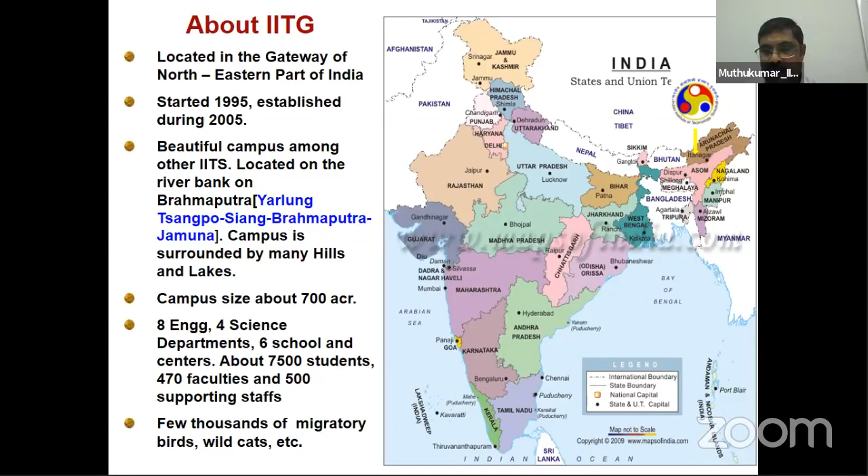So to begin with our talk, I wanted to give some introduction about the importance of energy. I think most of you are aware of the Sustainable Development Goals set by the United Nations, which need to be achieved by 2030. Most of the countries have committed to achieve these goals by 2030. There are 17 sustainable development goals: no poverty, zero hunger, good health, quality education, etc. Among these 17 goals, goal number 7 is energy, providing clean and affordable energy to all mankind.

Basically, sustainable development goal number 7 drives the remaining sustainable development goals. That means only if you achieve goal number 7 can you think about the remaining things. It is the source of the remaining sustainable development goals. Therefore, most of the countries are giving it more importance and taking keen interest in these goals. We are also committed towards this goal.

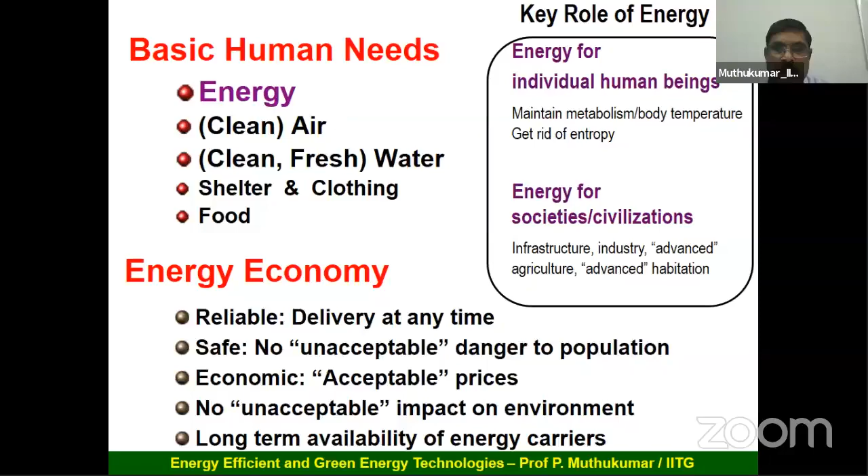So these are the important requirements of the future sustainable energy. If you see the actual fact, nearly about 13% of the world population do not have access to electricity. And another alarming situation is that around 40% of the population do not have access to clean cooking fuel. Even in India, only 46% of the people have access to clean cooking fuel. The remaining, of course, rely on fuels like firewood and even cow dung, etc.,

which is not healthy. And another thing is the global CO2 level is, of course, increasing. If you see the last 4 decades, there is an exponential increase. So considering all these aspects, this is the high time to transform our present hydrocarbon energy economy into an economy where we don't pollute the environment. That is possibly the renewable energy or the hydrogen-based energy economy, which will be explained later.

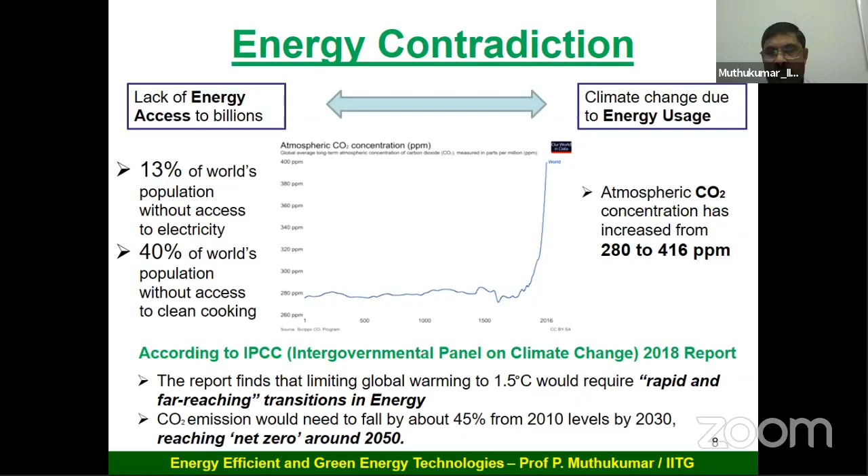And similarly, whatever energy is needed for the building sector as well as the industrial sector should be fulfilled by a source which is less harmful to the environment. So with this small introduction, let us see how our development, our innovation addresses this concern. LPG is the prime fuel in the cooking sector, and it also has a sizable share in industry, like the ceramic industry, the process industry, the pharmaceutical industry, even healthcare industries. Many industries use LPG, even PNG and CNG, as a fuel.

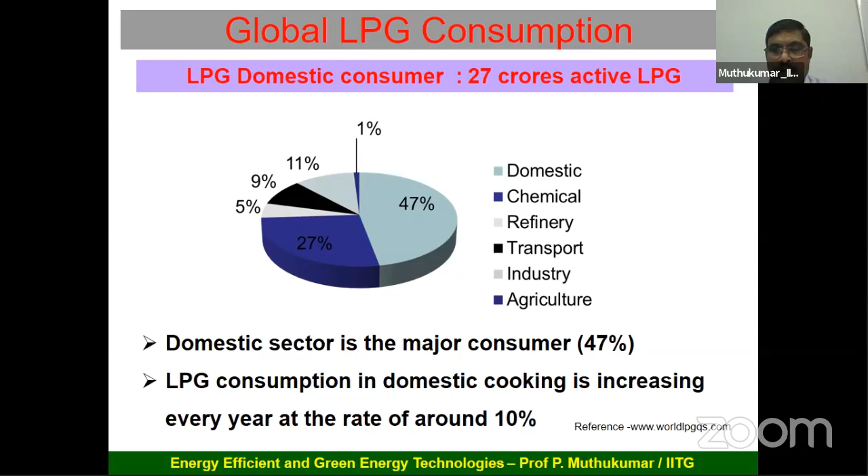We are the second largest consumer of LPG, mainly for cooking application. The demand for LPG is increasing steadily at the rate of about 10%, because our government is committed to provide clean cooking fuel to all in India. As I mentioned earlier, roughly about 50% of the people still do not have access to clean cooking fuel. LPG is a mixture of propane and butane, more or less in equal percentage, but their share may vary from place to place.

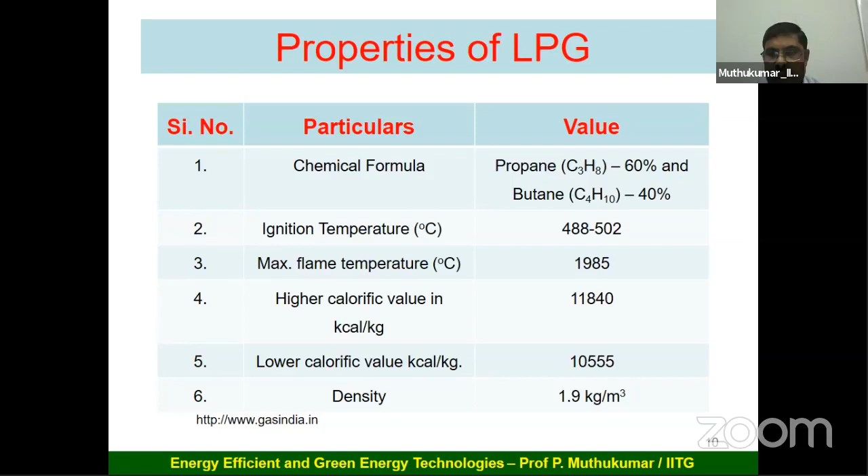The calorific value is roughly about 45,000, and density is near about 1.9 kg per meter cube. At present, we import nearly 50% of our requirement from other countries, and we get only 50% from our own source. This is a huge financial burden for India. By 2030, our government is committed to reduce crude oil import by 10%. This can be done only by exploring our own resources for cooking application, or improving the efficiency of the existing cooking devices.

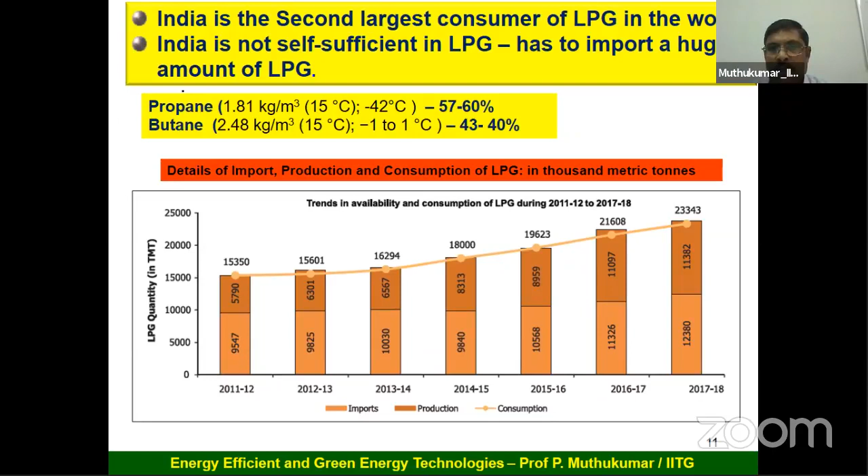And to make the fuel affordable to the common man, the poor communities, our government has been spending a huge amount of money as subsidy. Just to cite a figure, in the last year and even the current year, we are spending approximately 32,000 to 35,000 crore per year subsidizing LPG, from the current rate to a rate affordable by the poor public, and we also have schemes distributing LPG freely to certain classes of people. So our government spends a huge amount every year subsidizing the fuel.

Again, the fuel price is fluctuating; 900 rupees was the rate when I checked 15 days back. At present it may be slightly higher. So the prices are fluctuating to a large extent, mainly because, as I already mentioned, we are importing nearly about 50% of our requirement from other countries.

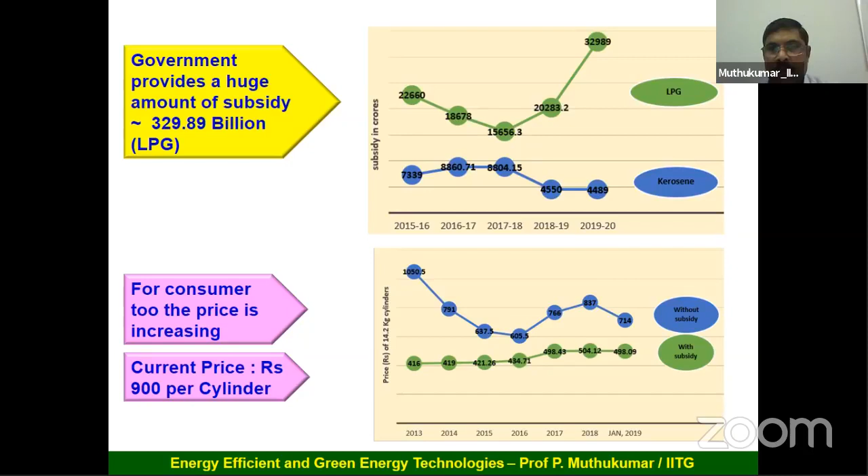Now if you look into the technology we have for cooking application, we have, for example, electric stove, induction stove, then LPG, PNG, and biogas. Each of these fuels has its own merits and demerits. If you see biogas, it is affordable provided you have a gobar gas plant at your own place.

These can be generated free of cost, but you have to take care of the maintenance. The reliability of the technology may not be so efficient, because mainly of the presence of high amount of CO2 in the biogas. Then the LPG stove, everything is fine, but it's very expensive these days and cannot be afforded by the poor class of people. And PNG, again everything is okay, but we don't have the infrastructure for taking this fuel to the rural level.

Coming to the electric stove, in terms of environment I have marked it red. The reason is that as a stove it won't pollute anything, but you have to see where we are getting the electricity. If you generate electricity from a coal-fired thermal power station, for every 1 kilowatt hour of power, the amount of CO2 emitted is roughly about 1 kg. Currently we have about 230,000 megawatts of power generated from the fossil fuel route, meaning every 1 hour we generate about 230,000 tons of CO2 emitted to the environment. That's why, as per environmental impact, all electrical related appliances are rated in red color.

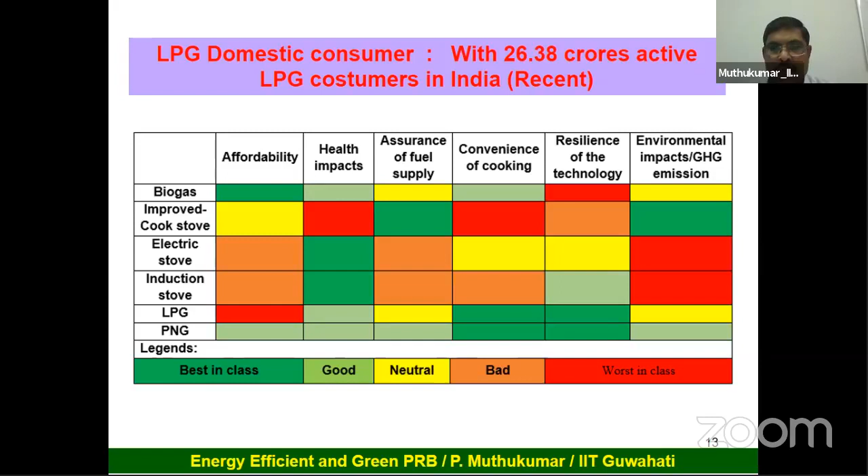These are the devices, the cook stoves available in the market, and most of the cook stove efficiency ranges from 60 to 65%. These numbers are based on laboratory conditions. When you test these stoves in your actual kitchen, the efficiency may be still lower.

Besides having low thermal efficiency, their emissions are very high. For example, CO varies from 400 to even up to about 1000 milligrams per meter cube, and NOx is also very high. These values are much higher than the standard prescribed by the World Health Organization. So we need to carefully think about redesigning the device.

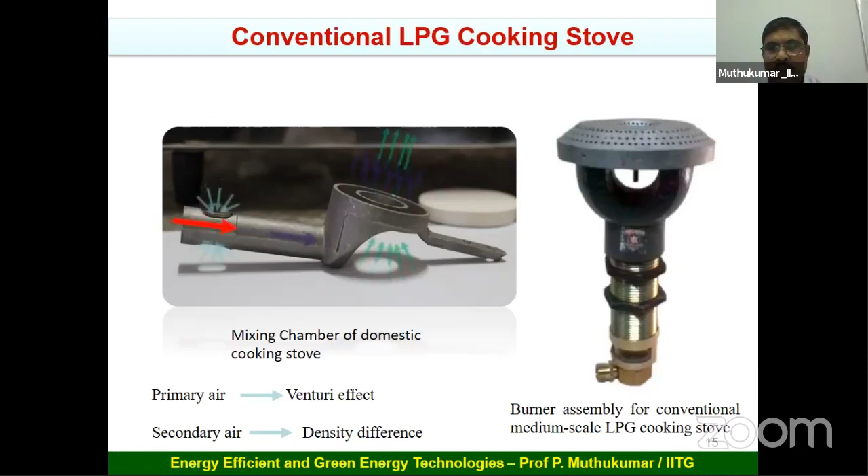Most of the existing cook stoves available in the market work on free flame combustion, where the LPG is injected through the nozzle, and at the exit of the nozzle you experience high velocity, which creates low pressure. Through natural air entrainment, air enters through the mixing chamber and gets mixed there. Then it comes to the top of the burner surface, where the gas mixture gets combusted, and you see the flame. So this is the typical operating stove.

To establish the performance of the commercial cooking stove, we have done the standard water boiling test following the procedure given in BIS 4246, conducting the water boiling test as well as the emission test.

If you look at this figure, the efficiency ranges from say 68%, that is when you operate the burner at low power range, about 1 kilowatt. When you operate at high power rate, maybe about 3 kilowatt, you get roughly about 60%. This is for the domestic stove.

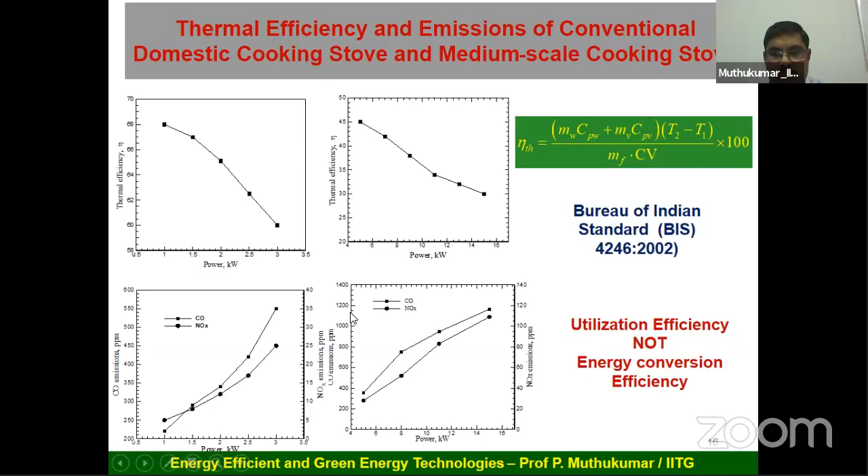Then coming to the commercial stove, which is used in hotels, hostels etc., where the power ranges from 5 to 15 kilowatts, the efficiency is very low, maybe in the order of about 30% when you operate the burner at say about 15 kilowatt. Besides having low thermal efficiency, their emissions are very high, in the range of about 300 to even up to 1,200 ppm, which is much, much higher than the standard prescribed by the World Health Organization.

So this is the background. To reduce the fuel consumption and make the device more efficient, we introduced the concept of porous medium combustion in the cook stove.

This technology consists of 2 layers of porous matrix: the preheating zone, made up of ceramic with low thermal conductivity, and above it the combustion zone, made up of highly conducting and radiating ceramic matrix, that is silicon carbide. These matrices are placed one over the other, with the preheating zone ceramic matrix at the bottom and the combustion zone ceramic above.

When the air fuel mixture is introduced through this matrix, combustion initiates between these two layers. Since the combustion happens inside the highly conducting and radiating porous matrix, some portion of the combustion heat is transferred back to the preheating zone, because radiation is a multi-dimensional phenomenon that can happen in all directions. As a result, the air fuel mixture is preheated from ambient temperature to maybe up to about 150 degrees Celsius before it reaches the combustion zone.

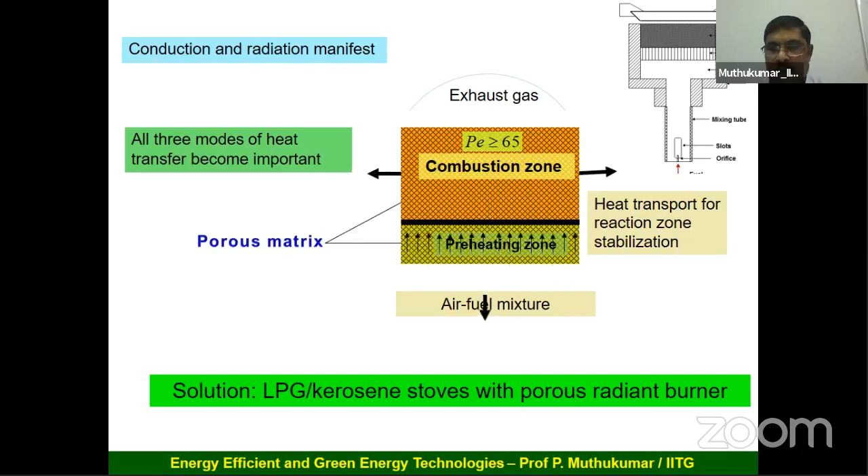In our burner, the predominant mode of heat transfer from the surface to the vessel is radiation, which travels at the speed of light. Whereas in a conventional burner, the mode of heat transfer from the flame to the vessel is by convection, so the contribution of conduction and radiation is negligible, as gases have low thermal conductivity and low emissivity.

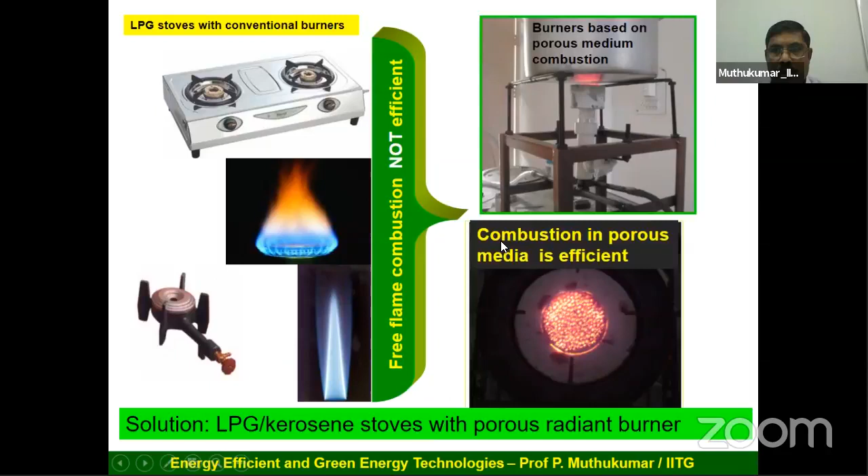Our burner is made up of indigenously developed low-cost material, and we are not using any metallic part. The predominant materials: the burner casing is made up of low cost ceramic, you can use alumina or a combination of alumina - basically these are ceramics. Then the preheating zone is again an alumina matrix, and the combustion zone uses a silicon carbide matrix. These are all very, very cheap materials, and we are not using any expensive ones.

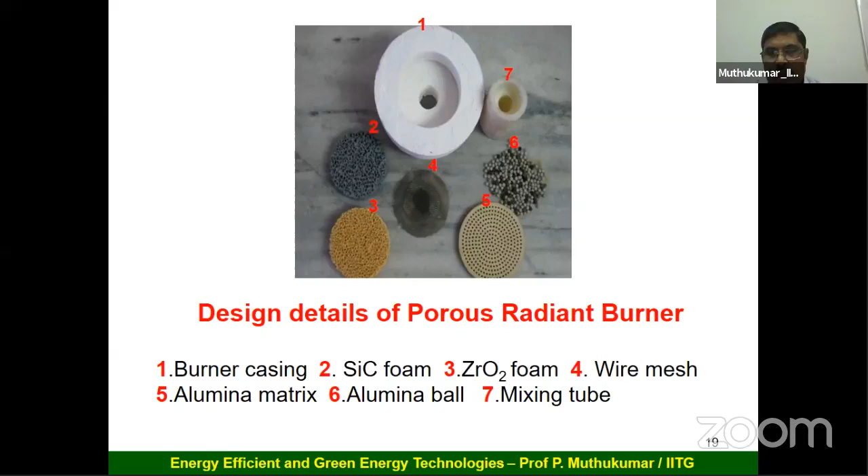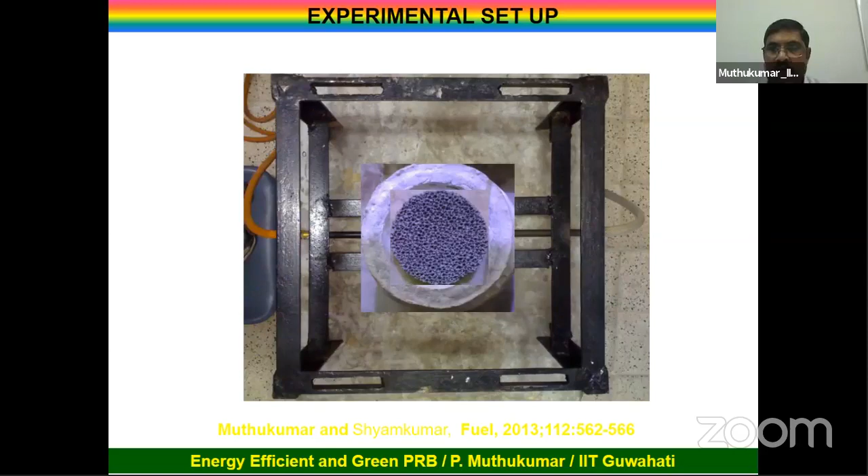The configuration is made very simple - this is a mixing tube, here we have the casing, then a wire mesh to support it, this is the preheating zone made up of alumina, and here we have the ceramic combustion zone. Though it looks simple, it's not so simple to design. The diameter, thickness, and porosity used for this construction were carefully selected based on rigorous thermal and combustion modeling. Even if you try to change the porosity or thickness, it will not work - it will lead to danger. So we have designed all these things carefully.

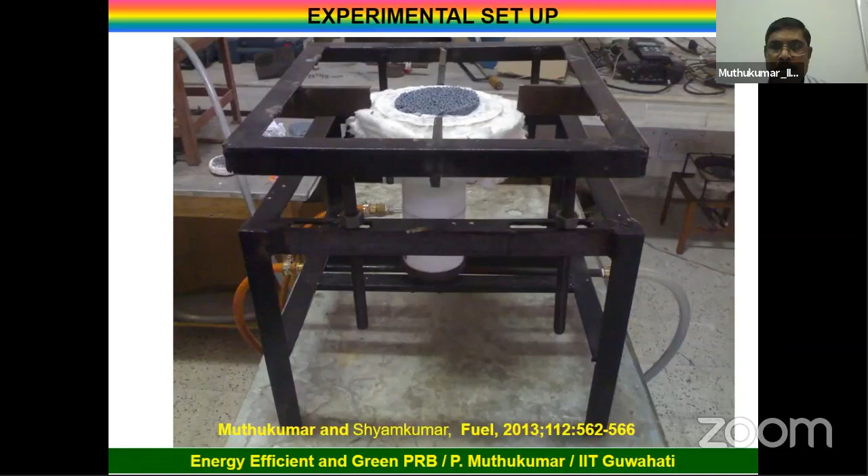Our burners provide much safer operation than existing LPG stoves, within our design parameters. This has been tested across several labs, hotels, and commercial spaces, and people are very happy about our technology.

Now let us see the burner which we have developed for domestic cooking applications. It's been a long journey - this research initiated during 2006 or 2007, and through different stages we faced several hurdles, and now we are in a position to take our product to the commercial market.

Initially, we achieved efficiency up to about 70 to 75%, with the regulator available being a high pressure regulator. Since, as per the BIS requirement, we should not change the specification of the gas regulator, we therefore need to go for a regulator which can provide only the 20 to 30 millibar supply pressure.

With this alteration in design, we achieved thermal efficiency close to about 81%, against the conventional thermal efficiency of about 60 to 65%. So with this new design, we could get a minimum 30% fuel saving.

Besides that, we have also done extensive controlled cooking tests, kitchen performance tests, and life cycle assessment tests. In all the tests, on average, we got about 30% fuel saving. In addition to 30% fuel saving, we also got a minimum 30% savings in cook time. This is very, very important.

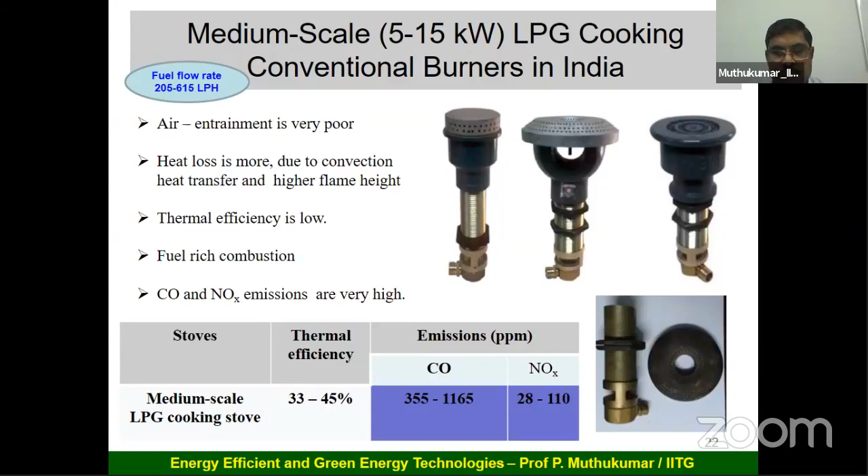Now the next step is to go for the higher scale, the large capacity stove available for commercial cooking, which has very low thermal efficiency in the range of about 30 to 45% maximum, and their emissions are very, very high.

So here we developed a burner for commercial application at different power segments. For instance, the burner which can provide output in the range of about 5 to 7 kilowatts showed efficiency close to about 65%, with 45% fuel saving, which is very significant.

This burner is already in operation in a few hotels in Bangalore and other places. Here also we could reduce the CO and NOx emissions to a larger extent.

This is the best available commercial burner, where the CO emission ranges from 330 to approximately 550 ppm, whereas our burner produces only 23 to 38 ppm, and NOx is almost zero.

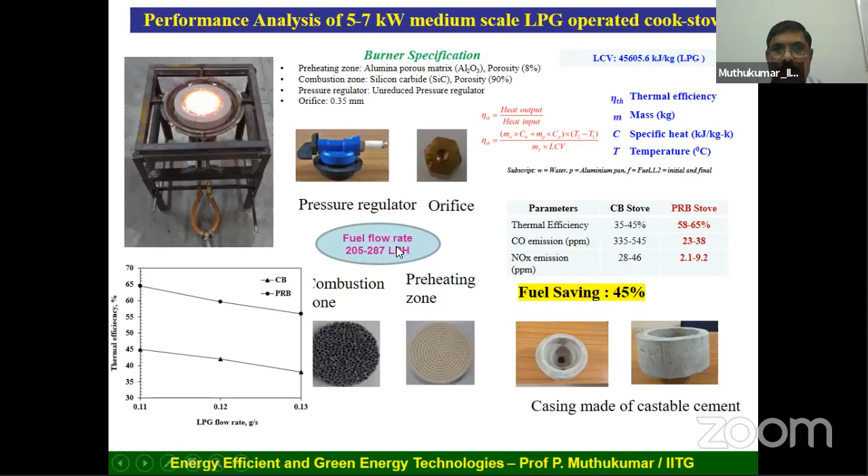If you want to go for higher power output, maybe up to about 10 to 15 kilowatts, we introduced the concept of clustering the burners. When you cluster three domestic burners, slightly higher this one, you can get power output in the range of about 15 kilowatts.

These high power range burners have their own niche application in cooking as well as in the industrial sector. Here we got efficiency up to about 67% maximum, and this burner yielded fuel saving up to about 60%.

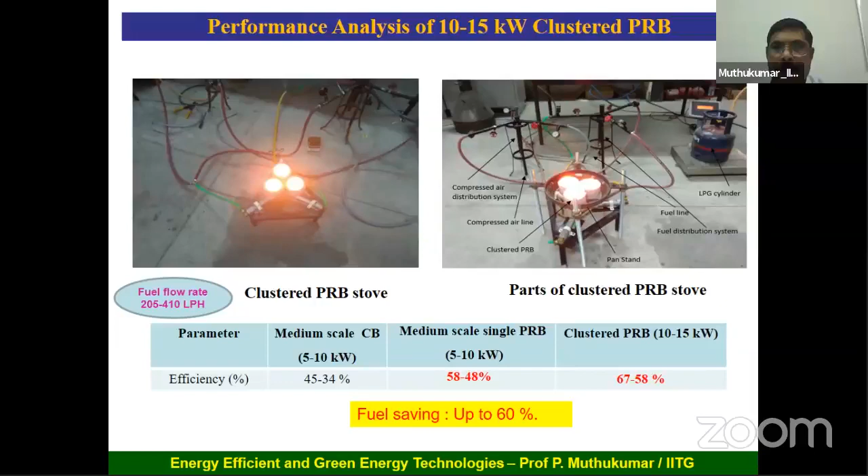These are the various stoves developed here, starting from the commercial one, this is 5 to 7 kilowatt.

All the performance tests were done based on the procedure given in the BIS standard by conducting the standard water boiling test. We also followed the ISO protocol, and the emissions were measured again using the Hood method, following the procedure prescribed in the BIS standard.

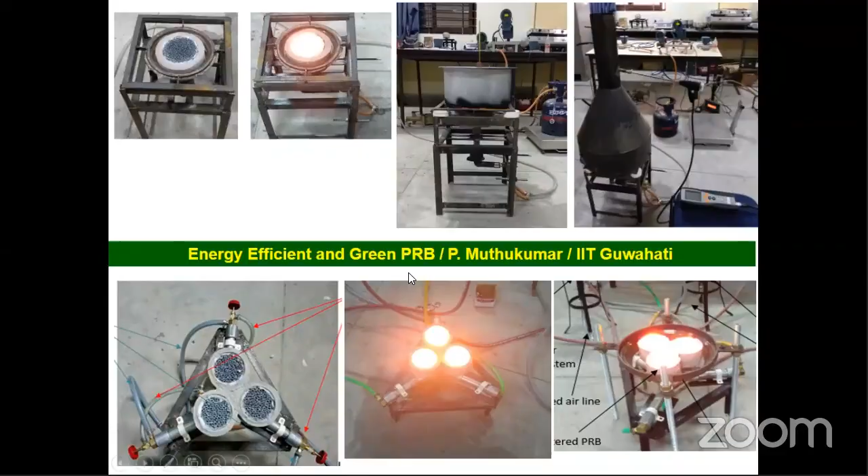We have also done the so-called techno-economic assessment. One can obviously ask, if the burner is used in commercial or domestic kitchens, what could be the saving. So we have done a systematic analysis.

We considered a commercial cooking stove available in our hostel, which consumes about 12 kg of LPG per day. This was taken as a reference, and the test was done over nearly 3 months. We performed cooking of the same kind of dish with our burner as well as with the conventional burner.

Based on the savings, the fuel consumption rate was observed over about 3 months, and we estimated the cost. The cost saving could be anywhere between 40,000 to about 68,000 rupees, as reported in the hostel for the commercial burner.

Even for the domestic LPG burner, this number was achieved based on old efficiency data, and with the recent data we could save nearly 4,000 rupees for domestic application. So the amount of saving is very, very huge.

If you see the cost of this burner, maybe the porous media burner for commercial cooking, it's maximum about 7 to 8,000 rupees, which includes everything. So whatever investment you are making, if you look at the cost savings, your investment can be retrieved within about a couple of months, not more than that.

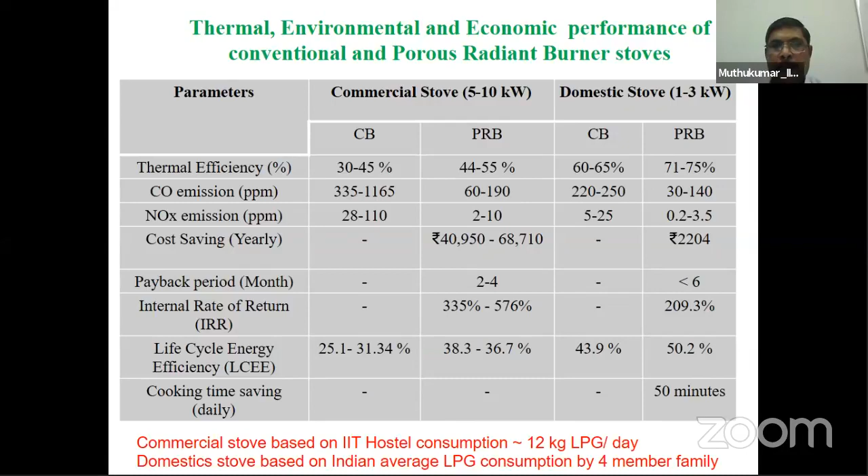That's how this so-called life cycle assessment has been done. I think these are the standard protocols which are followed by several researchers.

This is another interesting thing, which might be interesting for the women in the audience.

So we have done the so-called controlled cooking test, and we have taken the national average menu. These menus, of course, are prepared based on a family consisting of 4 adults. You can see here menu A consists of dishes like rice, pulse, vegetables, chicken, leaf bread, milk, tea, etc. And then you can see here this is the porous medium burner and the conventional burner.

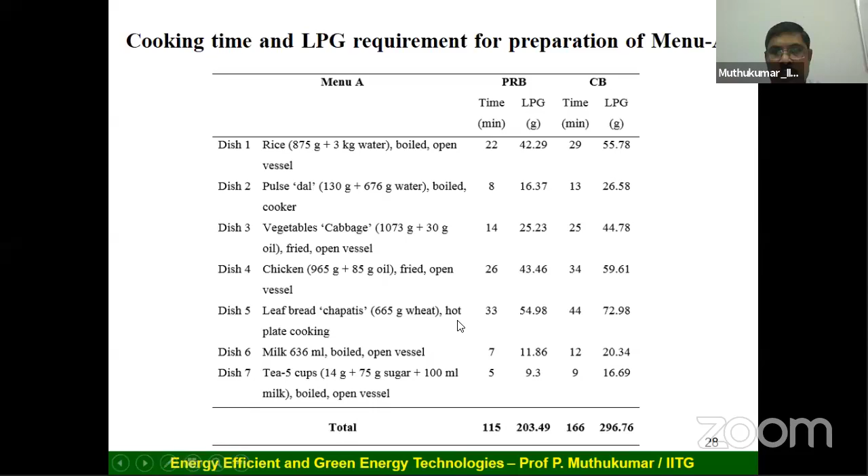We prepared these dishes side by side, and if you see the summary, our burner consumed about 200 grams of LPG and took about 115 minutes, whereas the conventional burner consumes roughly about 300 grams of LPG and took nearly about 166 minutes. So the fuel saving is more than 30%, and you can also save nearly about 50 minutes of time. This is for menu A.

So the saving is mainly because of the better cooking. The better cooking can be obtained by the effective transfer of heat from the burner surface to the vessel. In our burner, radiation is the predominant mode of heat transfer. In addition to radiation, there will be also convection. Because of the combined mode of heat transfer, we get minimum heat loss. Whereas in the conventional burner, the predominant mode of heat transfer from the flame to the vessel is by convection.

Then we have also done extensive work on kerosene stoves. Kerosene stoves are still prevailing in India, mostly used by migrant laborers, and though our government is not encouraging the use of kerosene, some class of people are still using it. So here also we have introduced the concept of the porous medium burner, and you can see a direct fuel saving of about 20 to 25%. And besides having higher thermal efficiency, we also reduced the CO and NOx emissions to a larger extent.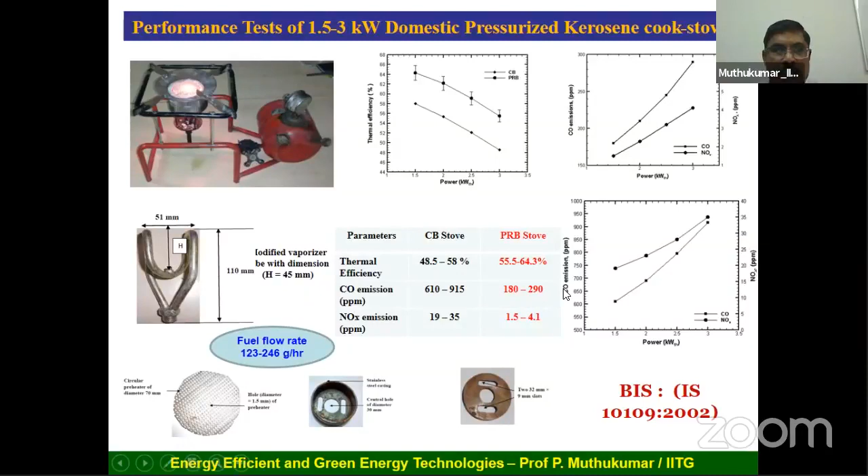Then, the disposal of waste cooking oil is a major challenge. What happens in the big hotel industry? They sell this waste cooking oil to a vendor. These vendors sell it to street food sellers, and people consuming it end up having several health issues. The waste cooking oil should be disposed of, used either for burning or some other application, and should not be reused for cooking. Countries in Europe and the US have strict protocols. We don't have any protocol, and as a result we end up with several issues.

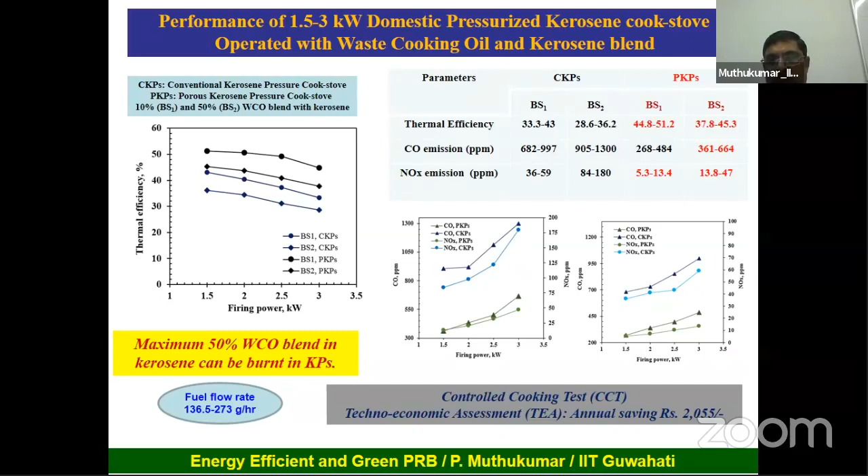So we tried to use this waste cooking oil for cooking application. We mixed it with kerosene and prepared several blends. Blend one is 10% waste cooking oil and 90% kerosene, and blend two is 50% waste cooking oil and 50% kerosene. Within this 10 to 50% range, we could get stable combustion. This fuel has been tested with both the conventional and the porous medium burner, and with the porous medium burner we could get about 25 to 30% more efficiency.

Another one is the porous medium burner developed for biogas. As I mentioned in the beginning, biogas is not being promoted much for cooking because of the lack of an efficient burner. That issue has been addressed here. This is the burner we developed for biogas. Now it is burning, and you can see the very beautiful burner surface without any flame.

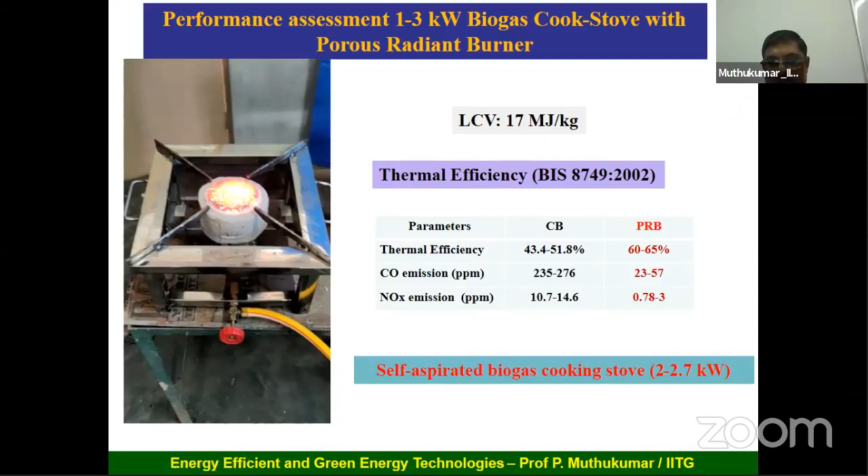With this technology, we can get about 30% fuel saving and also reduce the CO and NOx emissions to a larger extent. So with the introduction of this porous medium burner, hopefully there will be a major shift in biogas utilization as well. And now you can see here, this is the biogas burner for industrial application. It's a bigger burner.

Can you see the white wave? That is the white wave. Those are basically the radiation waves.

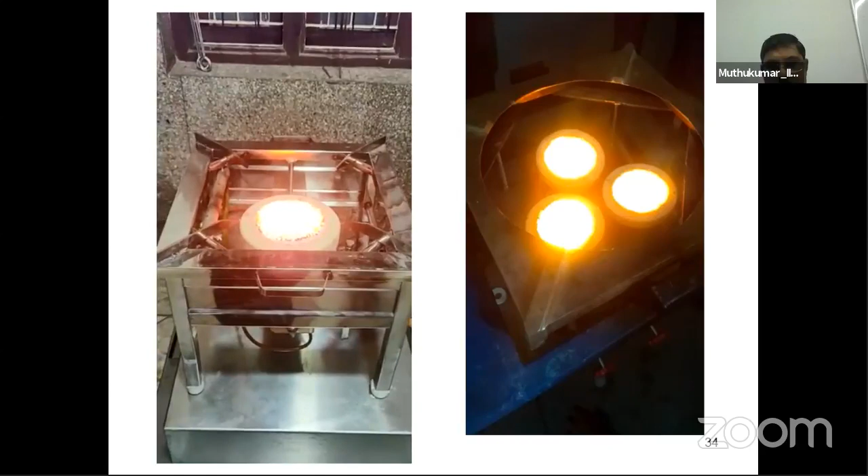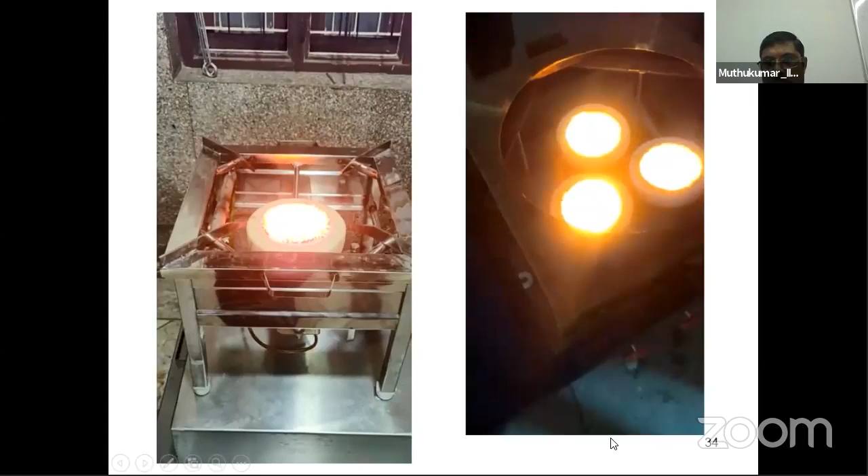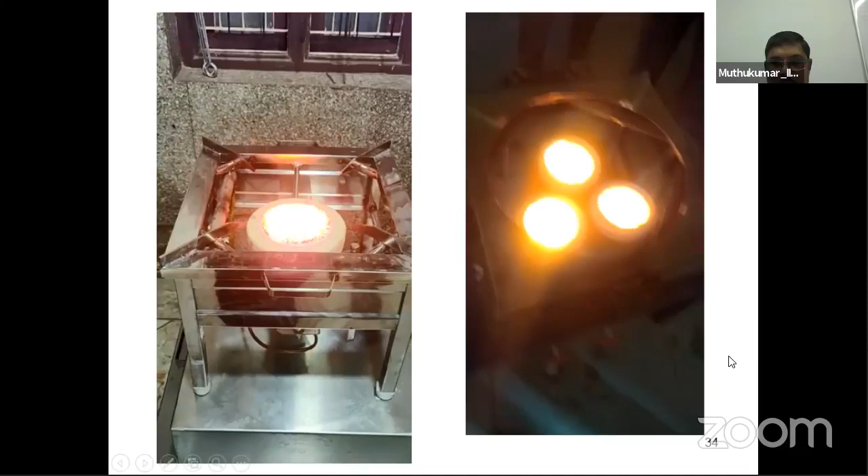So this is the cluster burner. This can be used in the hotel industry, for bakeries, or in the steel industry. You can use it for any application where you need a power range of about 10 to 20 kilowatts. And this is again used in one hotel.

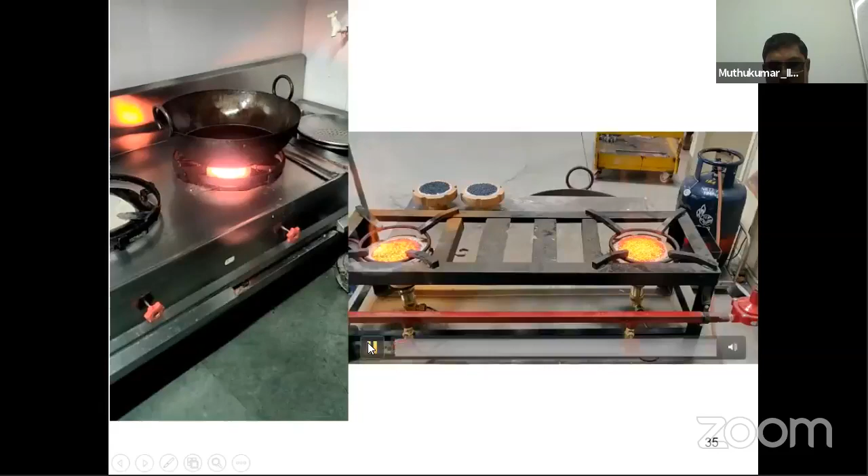This is again just us testing it. Actually, if you want, we can also have a partially pre-mixed flame. We can also design the burner for some application. The partial pre-mixed burner, like the burner you are showing, seems to be the better option. So this kind of burner, particularly if you use a kadai curved vessel, gives better efficiency than completely submerged combustion.

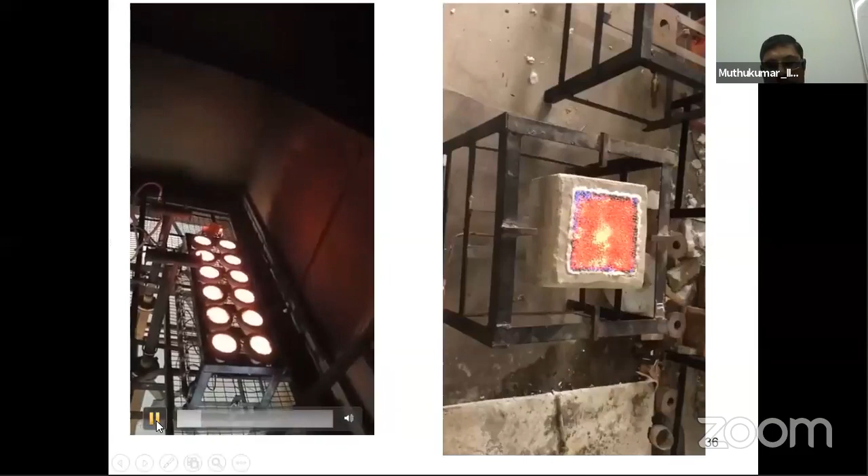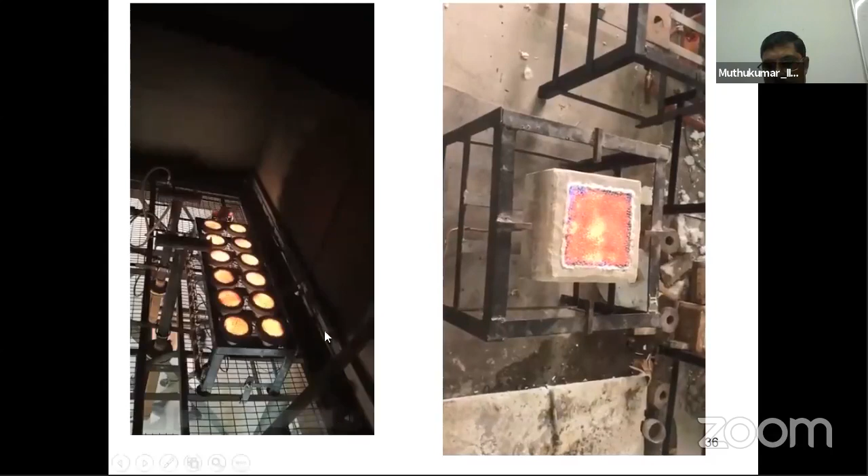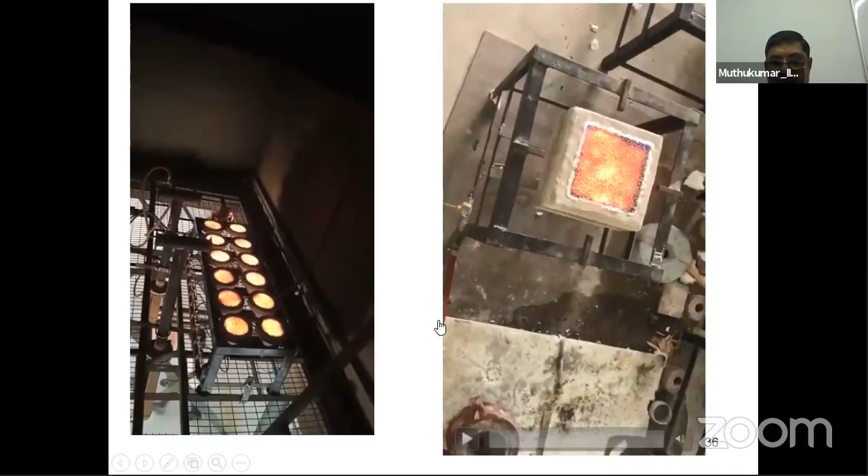Of course, our burner is being explored not only for cooking; now we are exploring several industrial applications. This one is for industrial drying. Here you can get straight away about 30 to 40% fuel saving. And this is another burner designed for the ceramic industry, as well as for cremation and biomedical waste disposal. So wherever we have thermal management or furnace applications, our burner can be effectively used.

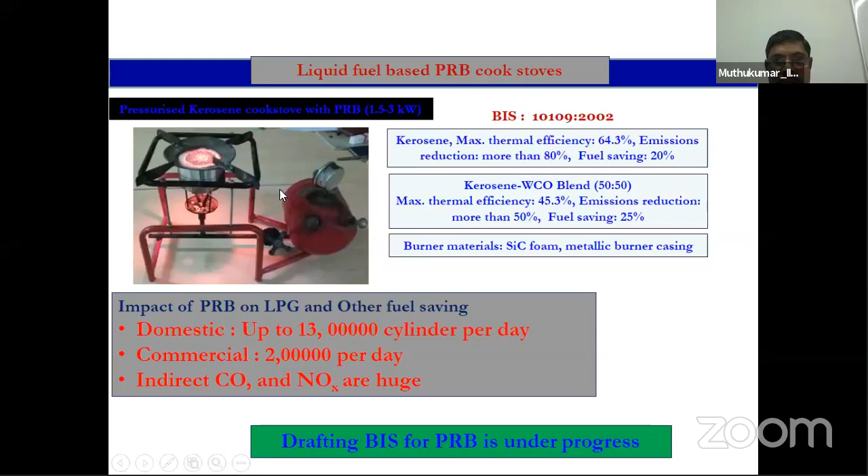And anyway, this I will discuss with you. This is about the waste cooking oil, and those things are given here. And our burner, the porous medium technology developed at IIT Guwahati, has been published in almost all leading news magazines and is highly recognized.

This burner secured one of the best project spots among the projects from the Government of India through the IMPRINT scheme. It secured a place in the top 15, and within the top 15 it was ranked number one. This technology has been tweeted by several dignitaries like the ex Minister of Higher Education, DST and AICTE.

Currently we are trying to use our technology for several applications, including space heating, particularly in high altitude regions. Our Indian Army camps use kerosene for space heating. Currently they are using big stoves, and when these stoves are kept inside the room they produce so much smoke that they cannot keep them inside for more than 10 minutes because of suffocation, and they have to keep them out. In high altitude regions you cannot use LPG, because it won't vaporize at such very low temperatures. So they have to go for liquid fuel, especially kerosene.

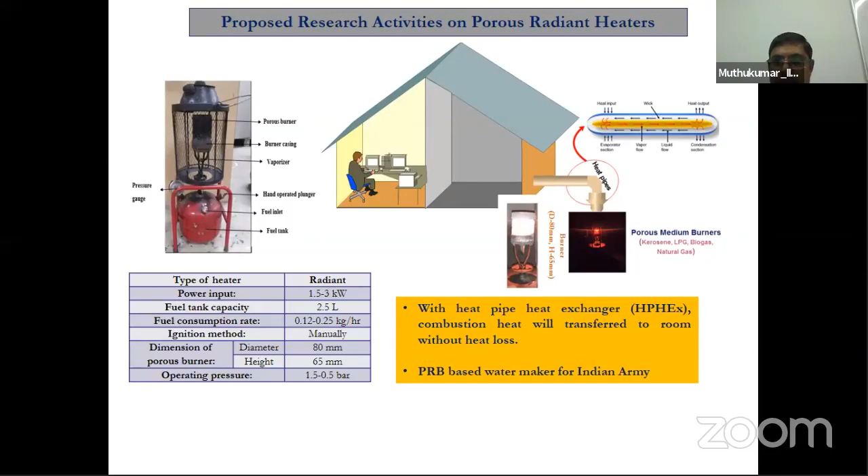So we proposed the porous radiant burner equipped with heat pipe technology. The heat produced from the porous radiant burner will be transferred to the room through the heat pipe. This is one of the ongoing projects with the Indian Army.

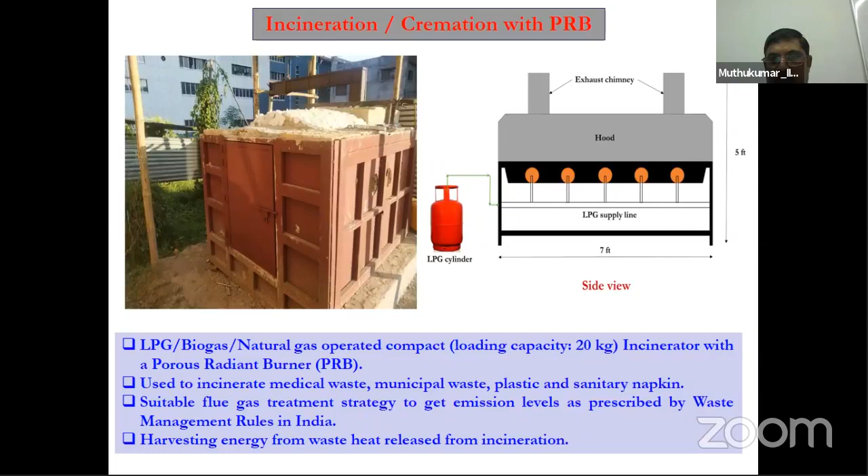We have also now developed a biomedical waste incinerator for handling biomedical waste, municipal waste or anything; it can be handled easily with our incinerator. And now we are developing a cremation unit with the help of this technology. With this technology you can cremate any body, particularly COVID infected bodies, by consuming only 20 kg of LPG or even less. This will save a huge amount of energy and also protect our environment.

Recently, the Government of India is promoting methanol as a cooking fuel, as an alternative to LPG. As I already told you, our government mandate is to reduce crude oil import by 10% by 2030. So that is our mandate. The NITI Aayog is taking this seriously and taking several measures towards it.

And so the use of methanol as a fuel for cooking applications was proposed last year, and then the task was given to me for drafting the BIS standard. So we drafted the BIS standard, which is in the final stage. Hopefully it will be published in about 10-15 days.

So for this methanol, there are several roadmaps. In about a year, our government is planning to launch about 1 crore stoves in the market, and subsequently this number will be increased. Methanol is projected to be produced from locally available resources at a rate of about 14 rupees per liter. 1 kg of LPG will be equivalent to about 2.2 liters of methanol in terms of calorific value. So that is the plan.

So once methanol is promoted as a fuel, definitely the dependency on LPG will come down. Particularly, this will play a major role in the rural sector. Here we have done a systematic investigation, and we have optimized and designed this stove carefully to meet our Indian requirements. We got roughly about 55 to 65% thermal efficiency, which is much higher than the numbers available globally.

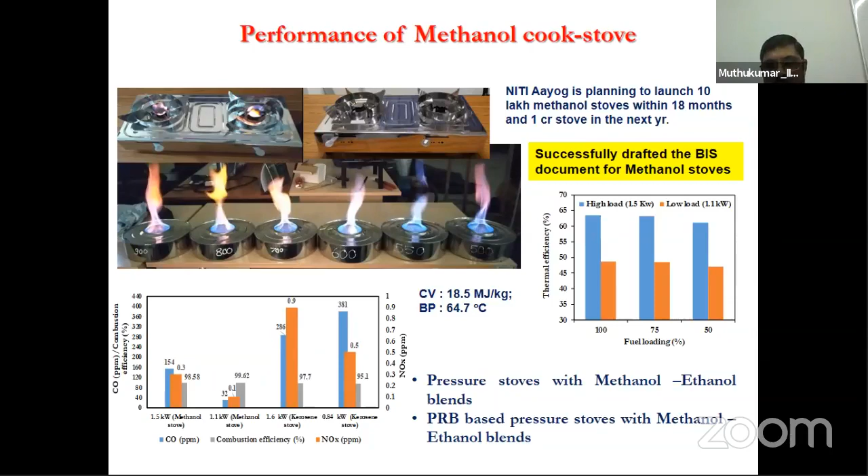Because methanol cannot be operated similar to the conventional pressurized stove, there are issues with methanol. Methanol has a high burning velocity, and methanol cannot be combusted like kerosene in the stove. There are several issues. Therefore, the only way of using methanol as a cooking fuel is in the form of a canister. But the canister has the issue: every 4 hours you have to change the canister and go for refilling. So this is a real challenge.

So what we have done now, we extended our technology, porous medium burner technology, for developing this stove. So you can see here, with this porous medium burner technology, we could successfully operate the burner with methanol. Here we got close to about 67% thermal efficiency, which is much higher than the canister one shown earlier. And here also we reduced the CO and NOx emissions.

The BIS standard for the canister-based methanol stove is already available, and it will be available to the public in about a couple of weeks. And soon we are also going to get the BIS standard for the porous medium burner with methanol. Now the technology is already transferred to the industrial partner, and we are in the process of taking this technology to the commercial market. Maybe in another 3-4 months, you can find our stove in the commercial market. Because of COVID,

there was a delay. On average, our stove can save nearly about 3 to 4 kg of LPG per cylinder. Currently, our consumption rate is roughly about 45 lakhs to 50 lakhs cylinders per day. So even if you take the minimum saving of about 30%, the amount of money saved for the government of India is roughly about 45,000 crore per year.

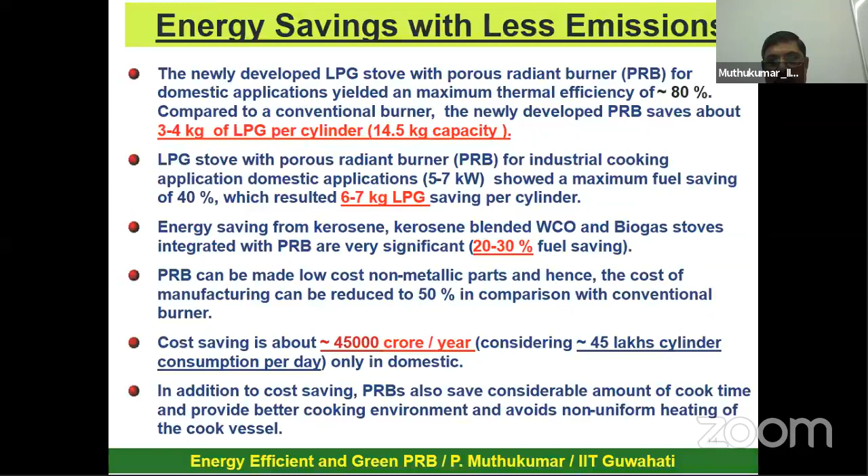Okay, so that's all about this porous medium burner.

So maybe I thank everyone. So if you have time, maybe I can also give another 10-15 minutes talk about hydrogen energy. Sir, please go ahead. This is a very interesting session. Please go ahead. Okay.

So anyway, just another 10-15 minutes about the hydrogen economy. This is another very important topic where our government is focusing. So this is our today's hydrocarbon energy economy. During the exploration of the hydrocarbon, which may be coal or fossil fuel or crude oil, during the exploration, transportation and storage, all three means, the water, air, and land, are getting polluted.

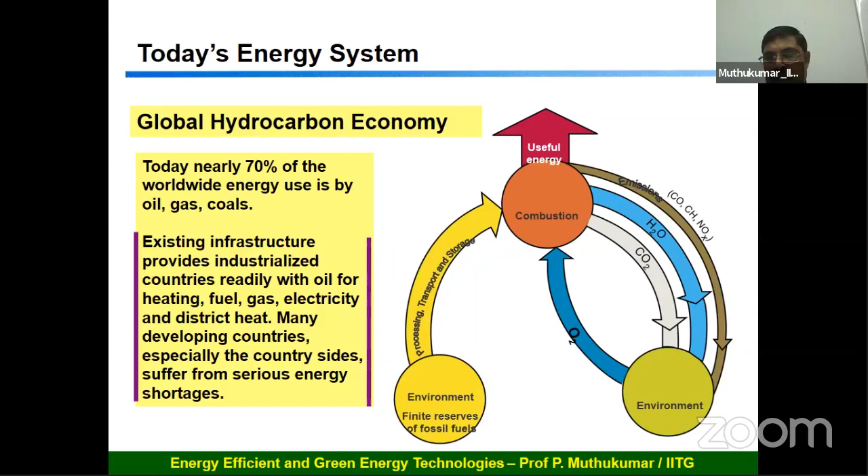And during combustion of this fuel, we are taking green oxygen from the environment, and what we are giving back? We are giving back harmful emissions like CO2, NOx, etc. So as a result, the environment is getting polluted day by day. That is the present energy scenario.

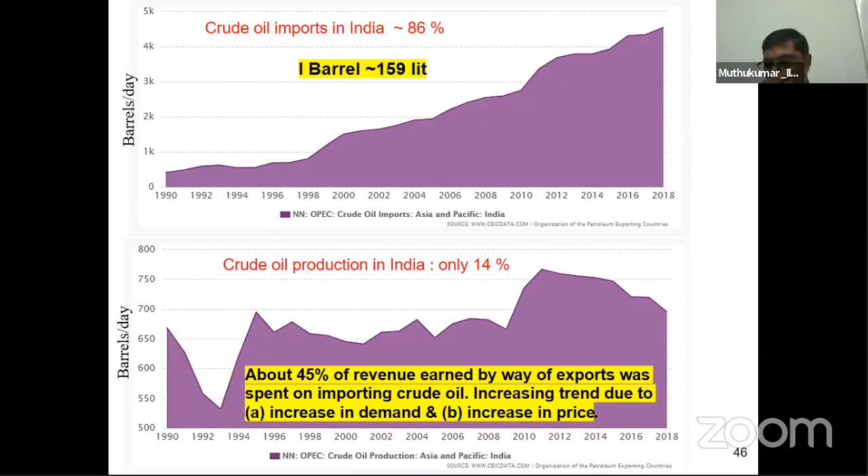So as you know, we spend nearly about 50% of our revenue importing crude oil from other countries. So as far as energy is concerned, we are not energy independent. That's why the government is exploring all possible alternate ways to cut the crude oil import. So this is our present energy scenario.

The recent figure may be close to about 390,000 megawatts of power, and majorly we are getting it from the coal-fired thermal route. Roughly about 62% of power we are generating from the thermal route, which includes coal, lignite, gas, etc. As I told initially, all these power generating sectors emit roughly about 240,000 tons of CO2 per hour, which is very harmful to the environment.

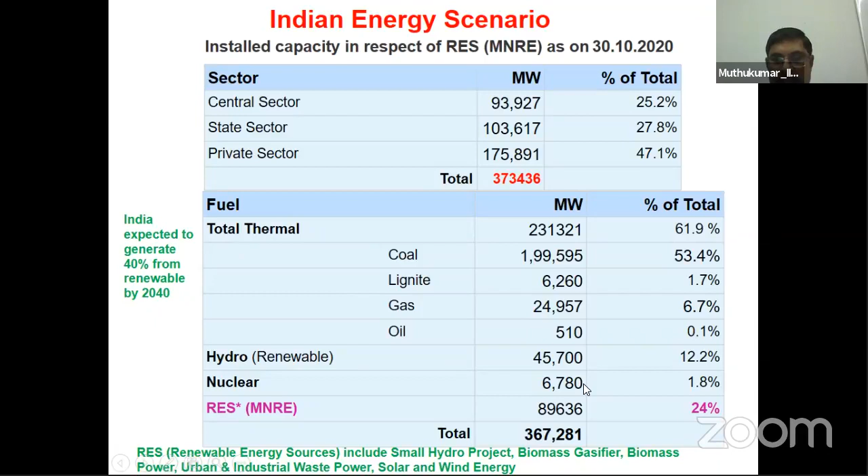And as far as renewables are concerned, our share is close to about 36%, which is much higher than the world average, which is really interesting. If you see the last couple of years, we are not encouraging power generation from the coal-fired thermal route, mainly because of the emissions.

And hydro increased by about 15% last year, if you compare the last 2 years, and nuclear increased, because since the nuclear capacity is very low, even if you add a few kilowatts and megawatts, the percentage will be high. And renewable, mostly we are promoting PV. Renewable increased by about 9%. This increase is with reference to the figure in the previous year.

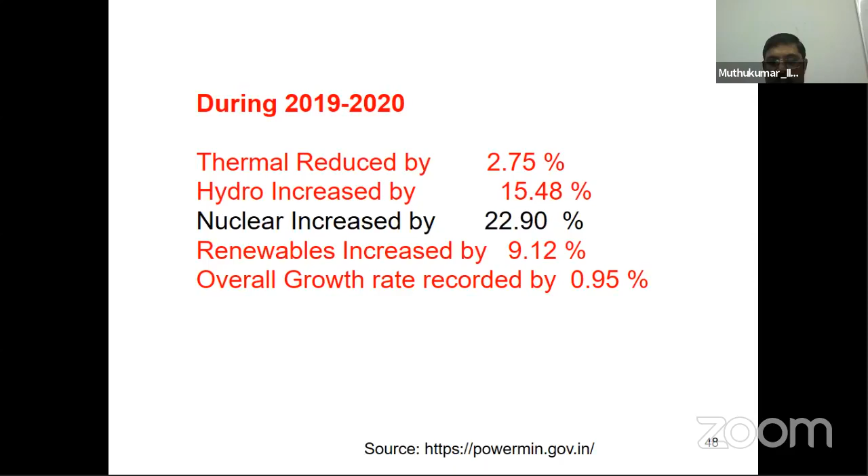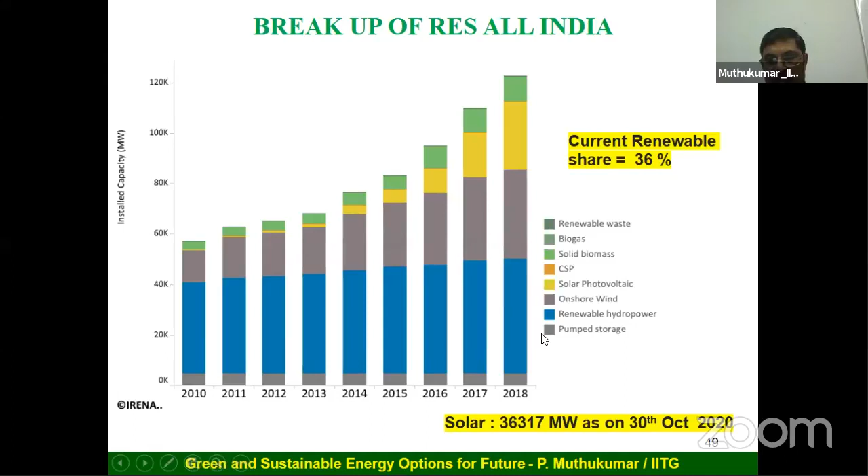The overall energy growth rate is roughly about 1%. The current renewable share is about 36%, majorly from hydro, followed by solar and wind. If you compare the three major energy resources, that is fossil fuel, renewables, and nuclear: fossil fuel is very safe and the technology is reliable. Coal may be available for another 300 odd years. But the major issue here is the CO2 emission.

Then coming to nuclear, safety is high, cost is moderate, and supply is unlimited. But there is an issue of waste disposal, on which of course there is a lot of debate, and I don't want to get into this controversial topic. So let's see the renewables. Renewables are environmentally clean and safety is very high. There is absolutely no process or component which is polluting the environment.

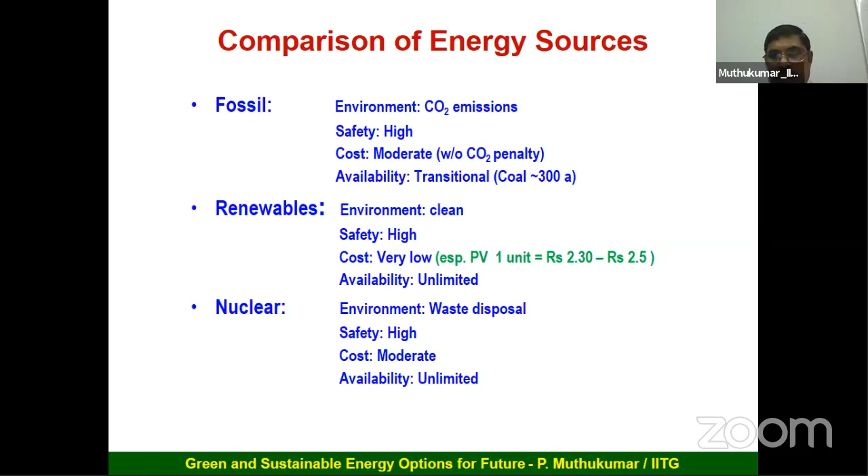It is very safe. And the cost of solar PV has reduced to a large extent without storage. There are schemes available, and through any one of these schemes you can get 1 unit of power generated from PV in the range of about 2 rupees 30 paise to 2 rupees 50 paise, against the conventional power cost of around 5 to 7 rupees per unit. That's why this is picking up very fast.

When you go for storage, the overall levelized cost will increase. It can go up to 12 rupees. So storage is the key issue as far as solar PV is concerned.

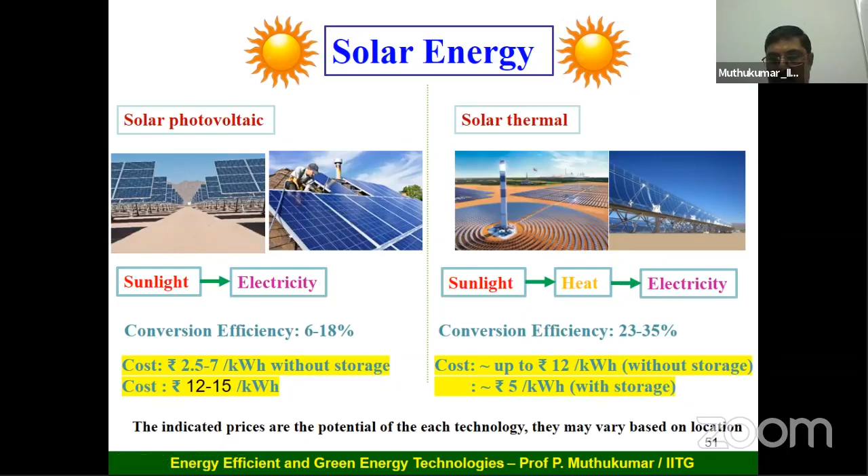Coming to the solar thermal, here conversion efficiency can be up to about 35%. And cost, if you are not going for thermal storage, cost is a little high. But if you go for storage, the cost will reduce maybe even below 5 rupees.

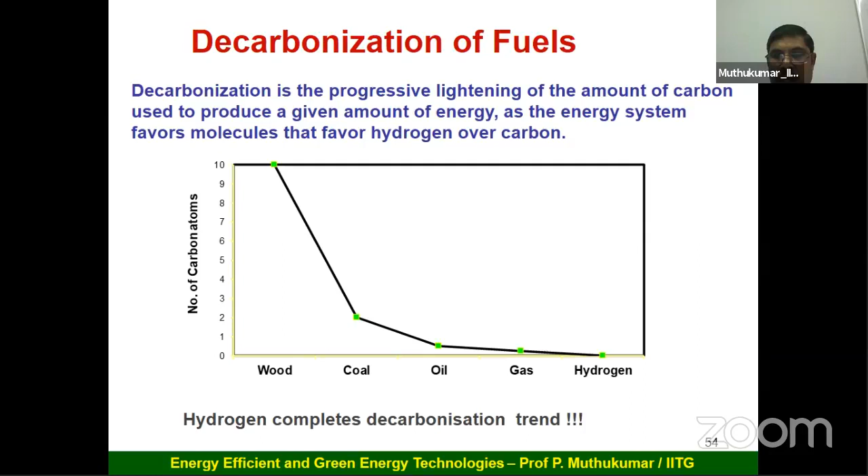About the energy transition. So in the 18th century, we used wood as the major source of energy, which contains about 10 carbon atoms per hydrogen atom. Then because of the high carbon, we moved to coal, which has only 2 carbon atoms per hydrogen atom. Then we moved towards oil, further reduced, and gas, which contains only 0.25 carbon atoms per hydrogen atom. And ultimately, we are moving towards hydrogen, which has, of course, no carbon atoms. That's how the energy transition will occur in the near future also.

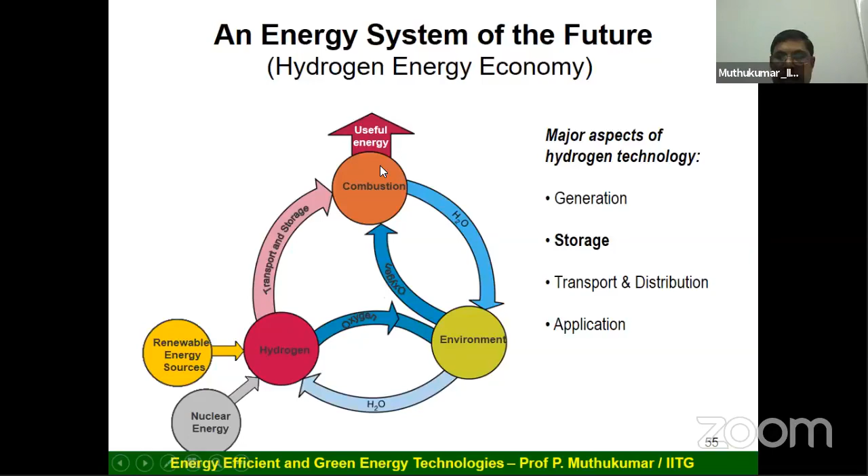And where we need oxygen, whatever oxygen was emitted during the generation can be taken from the environment for combustion. Okay, so then during combustion, your byproduct is water. So whatever amount of water is taken from the environment, the same water is given back to the environment. So if you look into the cycle, it's complete, and nothing is taken from the environment or left to the environment. So basically here hydrogen is acting as an energy carrier, like electricity, for transferring the energy available in the form of renewable energy sources to the user. So therefore the cycle is absolutely safe, reliable and sustainable. So that is the cycle we are looking for in the future.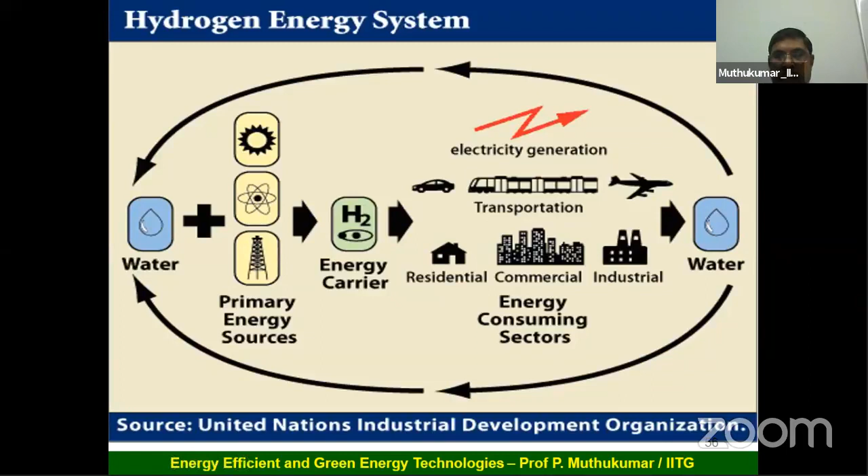Okay, so as far as the automobile application of hydrogen is concerned, this is a major debate. Storage is the key issue, since 1 gram of hydrogen occupies about 11 liters of volume at atmospheric conditions. So in the form of gas, it might be difficult to store. If you go for gaseous storage, you need a very huge tank for storing the hydrogen. But alternately, there are options, like liquid hydrogen. Yes, here we can store, but the liquefaction temperature of hydrogen is minus 253 degrees Celsius. So it's very difficult to achieve this temperature, and you cannot use liquid hydrogen in day-to-day practical applications.

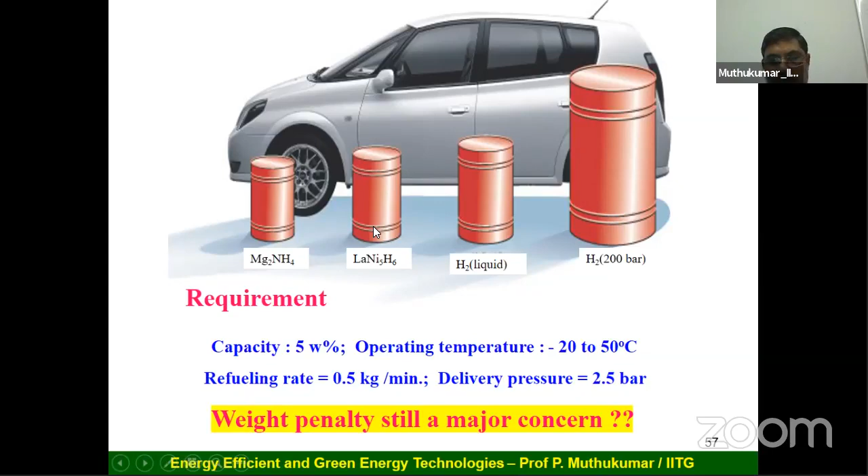Then the other option is that you can go for the solid state form using metal hydrides. You can store hydrogen in solid state form, which is reliable, safe and reasonably economical. That's what we are planning to use for practical applications.

So in IIT Guwahati, we have, of course, a very big team, and we have been working on hydrogen storage for more than a decade, and several PhD students have already graduated. And we have several patents and over 150 odd publications generated in this technology. And we developed several products, which have been transferred to industry like NTPC and many others. So we are working extensively.

We are working on hydrogen purification, metal hydride-based thermal storage systems, hydrogen-based cooling systems, hydrogen compressors, and all these machines are thermally driven machines. So here the main functional material is the metal hydride. Basically, metal hydrides are intermetallic compounds, and they can be produced by alloying different metals like titanium, lanthanum, manganese, etc.

So this can be produced either by ball milling or melting route. When this intermetallic alloy is exposed to hydrogen at certain temperature and pressure, it absorbs a huge amount of hydrogen, and during absorption, it releases heat. This is an exothermic reaction.

And in reverse, when you supply heat to the metal hydride, the hydrogen will be released from the metal hydride by taking the heat. So basically, these two reactions are the absorption of hydrogen by the metal hydride and the desorption of hydrogen from the metal hydride. Both are reversible in nature. So by using these two reversible chemical reactions, you can build several engineering applications.

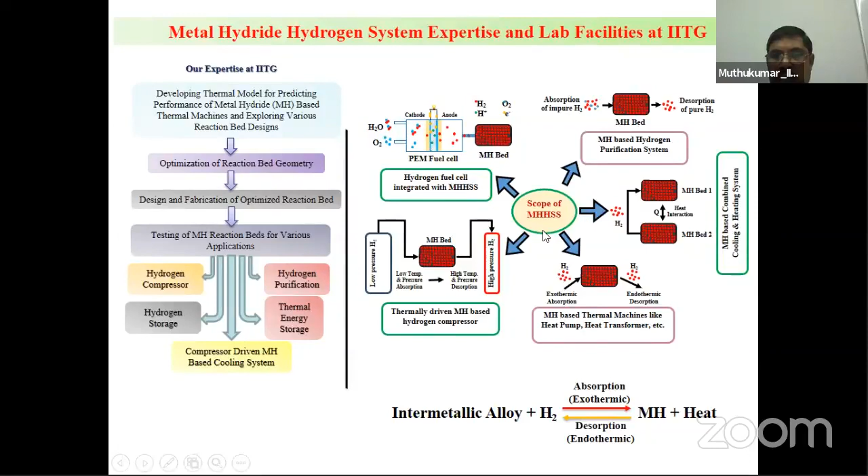So now you can see here, when you store the metal hydride inside the reactor, it can generate heat. This heat can be anywhere between 100 to even 200, 300 degrees Celsius, which can be used for several applications. On the other side, when you discharge the hydrogen from the metal hydride bed, it will produce cooling.

Now you can see here, within about roughly 2 minutes, you can see the formation of ice over the reactor. If you allow it for a few more minutes, you can see the complete reactor will be filled with ice. So this can be used for several applications, including cold storage, air conditioning, refrigeration. Many applications can be explored.

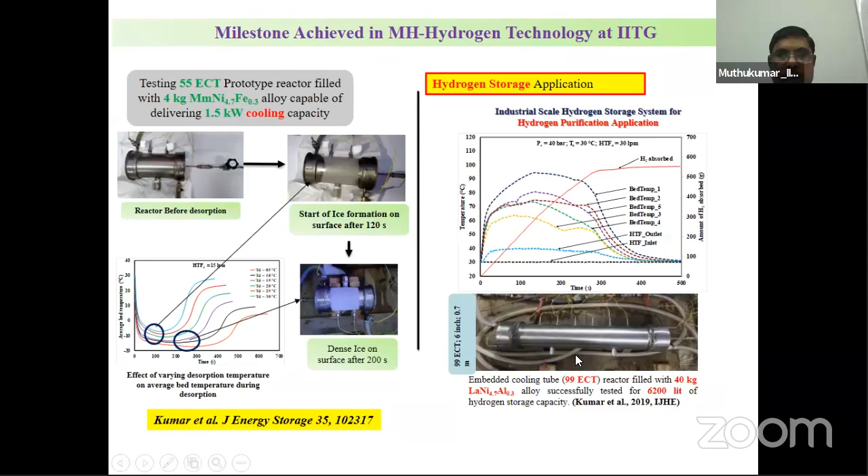See, whatever reactor we are showing here can store nearly about 6,000 to 11,000 liters of hydrogen in very safe conditions. This is another reactor here. Here also it can store nearly about 6,000 liters, but if you go for better material, this device can store up to about 11,000 to 12,000 liters of hydrogen.

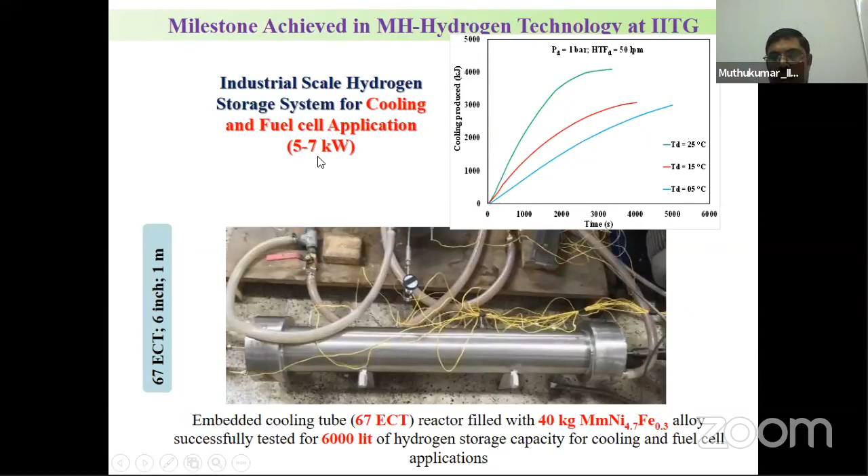And in addition to that, when you consume the hydrogen from this reactor, it can produce a cooling effect of roughly 5 to 7 kilowatts, that means you will get a cooling effect close to 2 ton AC capacity.

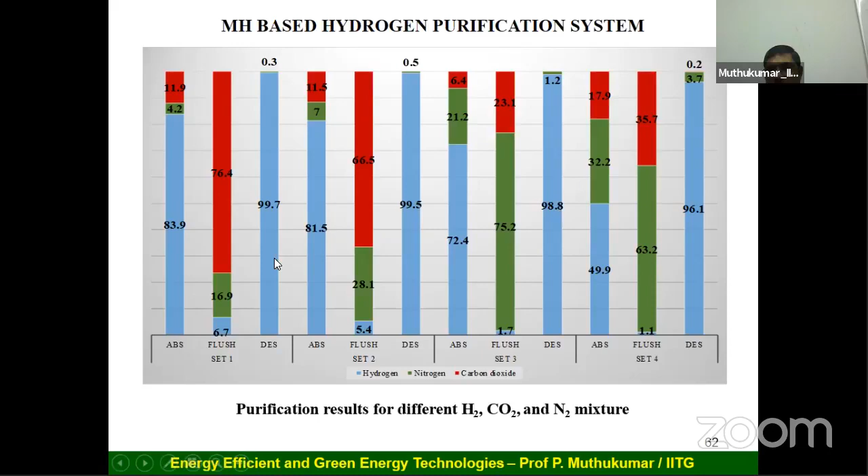Okay, so again, this technology can also be used for hydrogen purification. Even if you have a purity level of only about 50%, with the remaining being CO2 or CO or any impure gas, you can use our technology, and at the end you can get high purity hydrogen anywhere between 99 to 100%.

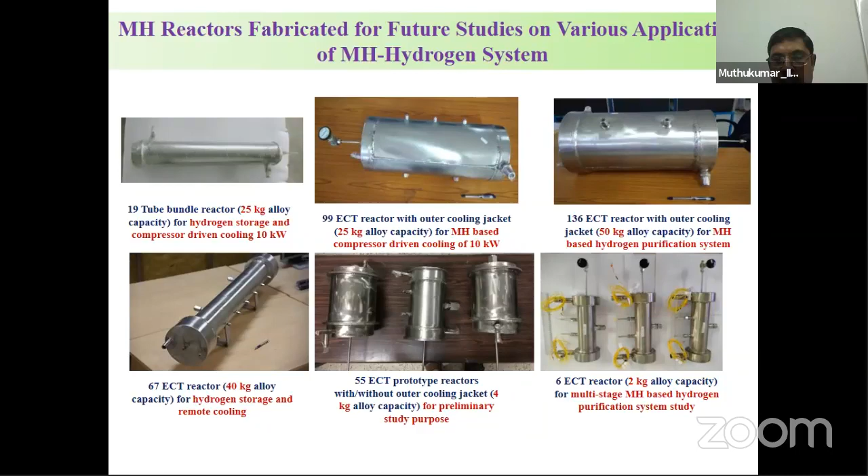This technology was transferred to NTPC. So we developed several such devices for various engineering applications, catering to hydrogen storage, hydrogen compression, thermal storage, cooling and heating, and even hydrogen purification.

Even if you set a fire, the fire will move in the upward direction, so nothing will happen to the vehicle. In case of the petroleum or diesel vehicle, the damage is bulk, so everything gets destroyed. So there won't be any issue.

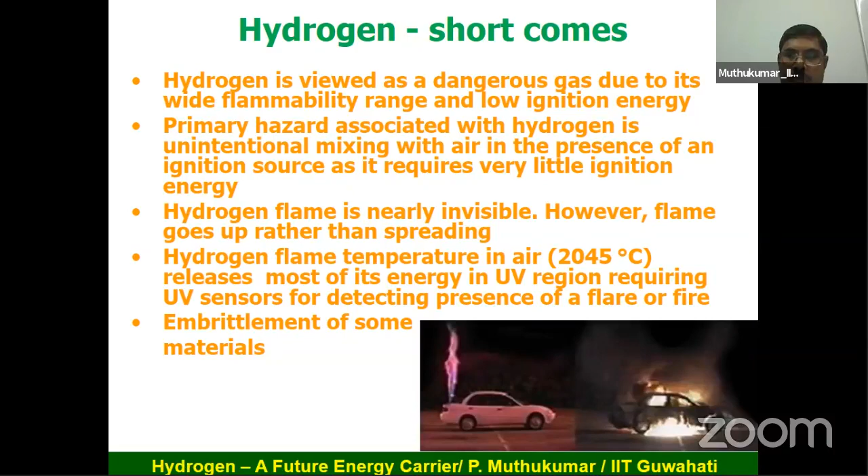And you can use it for this. If any accident happens, because of the high diffusivity velocity of hydrogen, it will try to move in the upward direction. So this is again the hydrogen based automobile plant. This is the current status.

Australia is the world's largest producer of hydrogen. Currently they are producing hydrogen at the rate of about $2.5, and it will be reduced to close to maybe about $1.9 - that's what they are promising by 2030. Again, this is from the solar PV route.

And in India, of course, most of the hydrogen is produced from coal reforming, and its cost is about 170 rupees, and natural gas also about 160 rupees. Solar PV seems to be a bit expensive, but when you have excess power generation from solar PV, the cost will reduce. And recently there was some announcement from a leading industry in India.

They are planning to produce hydrogen at a rate of $1 per kg. If you produce hydrogen at about $1, that will be a major breakthrough in the automobile industry as well as in the manufacturing industry.

So the cost of manufacturing industry, particularly the steel mill industry, will come down maybe 30 to 40%, even to a larger extent.

Several countries came out with a very interesting plan. For example, UK is planning to stop all IC engine equipped automobiles by 2025, and stop the usage of all fossil fuel based automobiles by 2040. India also will promote the use of electric vehicles, and particularly hydrogen fuel vehicles, by 2030.

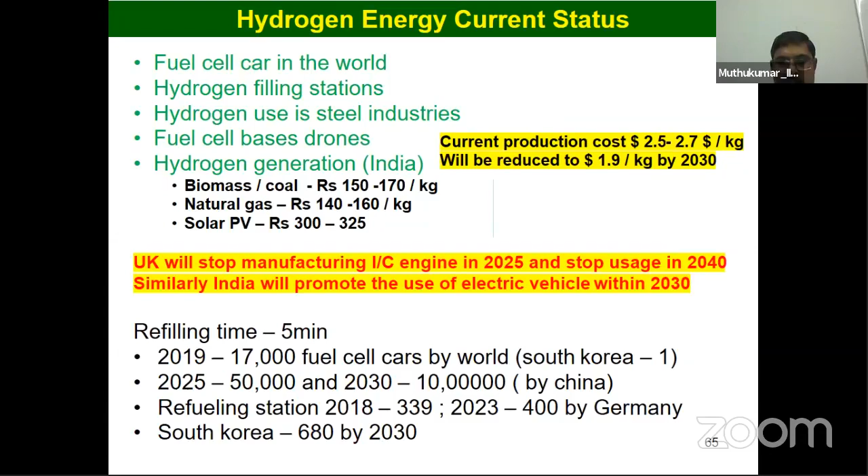As far as fuel cell vehicles are concerned, currently Japan is the leader, with nearly about 1 million vehicles. South Korea also has a huge number of vehicles. China is planning in a major way - by 2030, they're planning to launch about 1 million hydrogen fuel cell based vehicles. Countries like Germany and South Korea are also planning in a big way.

Now we are in the electric vehicle era. The battery charged vehicle will provide an intermediate solution, but later we'll have issues with the battery. Since most batteries depend on lithium, and we don't have enough lithium resources, if we go for larger use of lithium, then we'll have issues.

So the ultimate goal is to move towards hydrogen. Here we can use both technologies - one is direct hydrogen combustion, and that is one route. Another route can be through the fuel cell route. So both technologies can go parallel, and both have their own pros and cons.

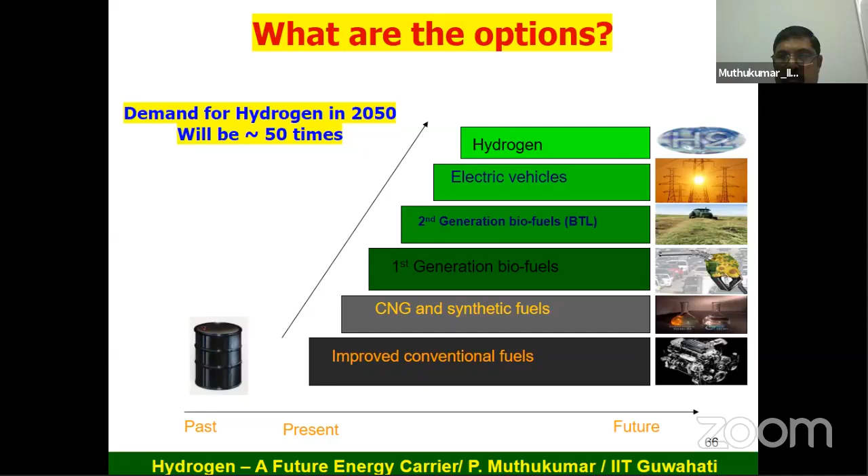Maybe by 2030, I'm sure this technology will boost up and play a major role in the automobile sector as well as the industrial sector. It is predicted that by 2050, hydrogen demand will increase 50 times. It is true, given the way the hydrogen economy is booming - it will definitely end up with this situation. So therefore, we need to prepare for it.

Before closing my talk, I want to give one very interesting project implemented in Germany. The Germans have almost 30% surplus power generated mostly from renewables. In order to safeguard their grid, they send their excess electricity generation to Poland by paying money - in fact, for selling the electricity, Germany is paying money for it. It's the other way around.

A very interesting project has been proposed, which is very successful, and they are going to implement similar projects in different parts of the country. Whenever they have excess power generation from windmills or solar PV or other renewables, the excess electricity generated will be converted into hydrogen. The hydrogen will be stored in the form of metal hydride or as gas, and then later this hydrogen will be used as a fuel for automobiles.

Whenever they need power, this hydrogen can again be used to generate power through the fuel cell, or part of the hydrogen is injected through the natural gas grid along with biogas - it's a kind of producer gas. This gas is used for several applications including cooking and heating. So in that way, they are utilizing their excess electricity generation.

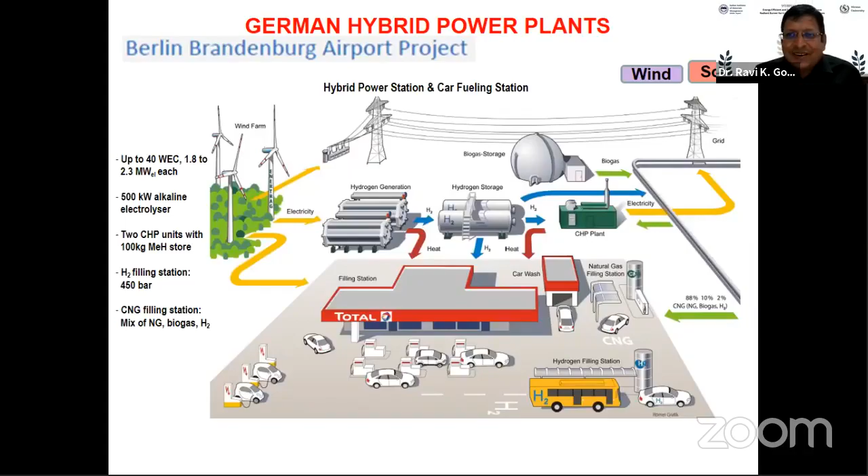Our honorable IIMM member Shri Goyal Saab also has some query. Good morning, good afternoon. Same question from my side. This is your cooking porous radiant burner - is it for our purpose? Is it available in the market or is it under research status?

So this is currently not available in the market. It is about to be commercialized. Actually there are some burners, surface combustion burners, which are also claiming to be a porous radiant burner. I think they are importing from some countries, some vendors are supplying it, but that is not our burner. So our burner is yet to be commercialized, yet to be launched to the market.

Now, how much time will it take? Maybe 3 months. In 3 months we are in the final stage, so we are working out all the production strategy, everything we are working out. Maybe before December, you can see our burner in the commercial market.

Another question linked with this: how can we judge - is the shape different, or is there some tag mark around this burner? How can we differentiate? I could not get your question clearly, can you say again? The same present burner we are using now in houses, and your developed burner - how can we differentiate in the market? Is there a category or anything special?